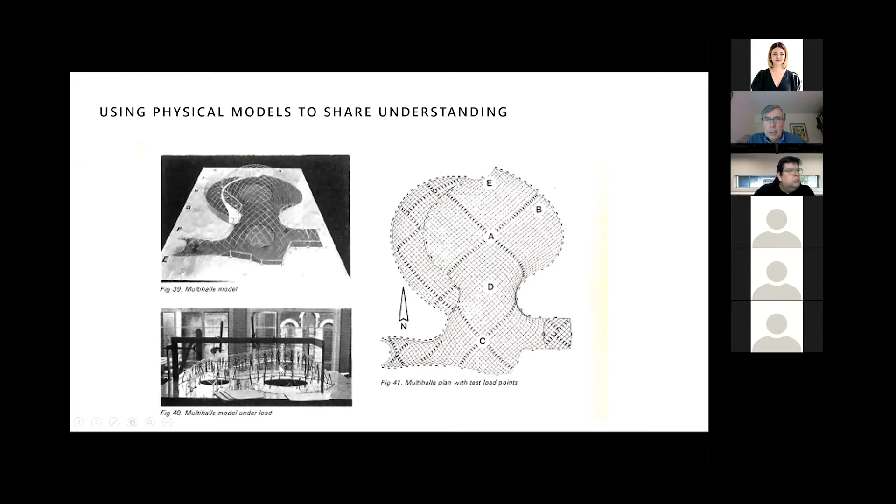And I was busy hanging nails on models of this thing just to find out when it was going to buckle. And that was really exciting and fun because I could feel the forces. I also had to write computer data to go into it, and that wasn't very exciting. And I never did get my computer run to run because computers were big, ugly things in those days and not very user-friendly. So I didn't get very seduced by that.

But out of this, when I was 18, I started to find people I wanted to align with and built an agenda around natural forms and efficient forms. And that drew me away from London to Bath, where Ted had set up a practice called Buro Happold, and the university, working, in fact, up at the university on models for air support structures. You can see the wonderful low-tech research that I was doing, nothing like what you could do now.

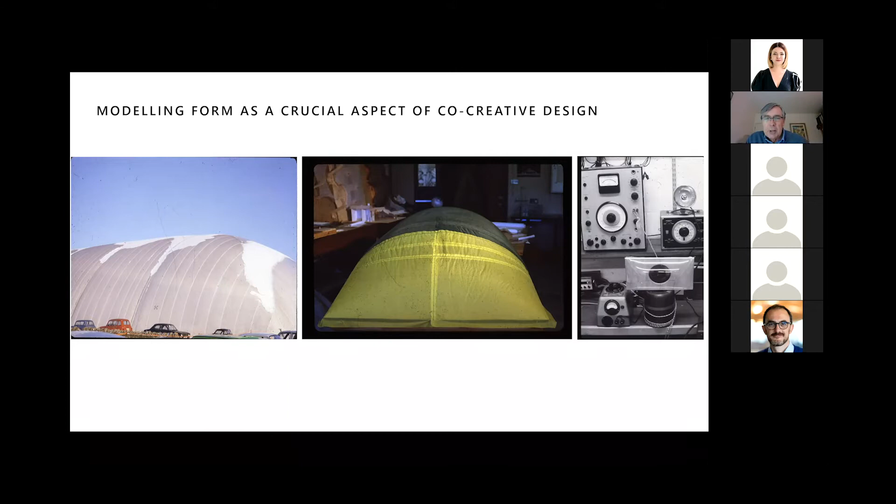But that set me off on a trajectory with Ted Happold and his various partners that had set up Buro Happold, looking at natural forms and how we might build them. So on the right-hand side, building models of these rather interesting and beautiful, naturally inspired forms. And that took me in the very early part of my career to kind of seduce me fully into this idea of beautiful buildings, co-created between architecture and engineering, buildings which really didn't know whether they were architecture or engineering because they were both at the same time.

And going right through to this 58 North project for Alberta, a large inflated roof over a whole community, where you had to bring in psychologists, sociologists to really understand the impact that putting a whole community under one big roof might have.

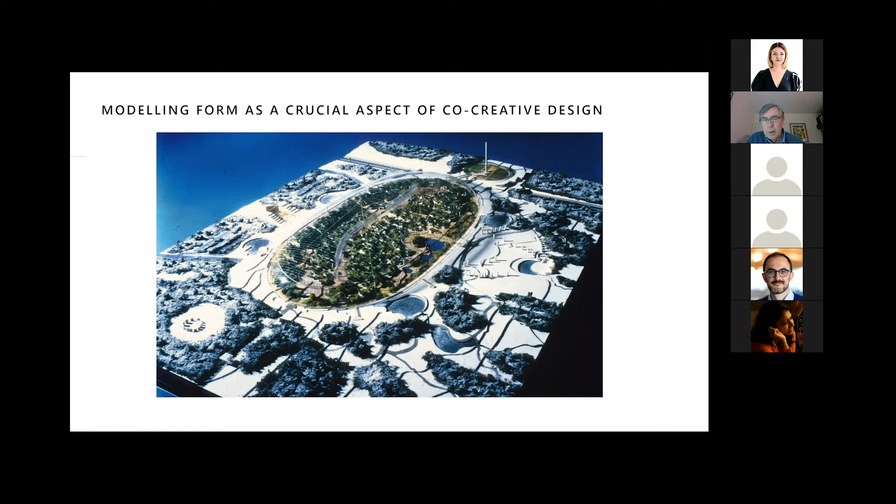So I realized out of this was coming a kind of instinct for collaboration and the using of the central model as part of that collaboration. And with good collaboration tools like physical models, being able to co-create so that you could sit around a table, model in the middle, and whether you were an architect, a building services engineer, a structural engineer, or a client, you could kind of communicate to each other. And out of that communication, you could co-create your answers.

Now that was my start, but I couldn't spend all my time doing lightweight structures. So when I did more straightforward structures like this at Bedfont Lakes IBM marketing headquarters, I found myself lucky enough to also work with collaborators who were really interested in this coming together of engineering, architecture, materials technology, and effectively natural forms. And so working with Patty Hopkins at Bedfont Lakes, I was even there able to bring in things like tree-like columns, which got bigger towards the base and celebrated the connections with the exposed beams, shading, which was just lightweight, canopy over the atrium, and so on.

It's a stretch, but working with architects there who were really interested in what the engineering wanted to say, what the physical solutions really wanted to be, and how best to use materials, allowed me to carry on what I'd learned in Bath into mainstream architecture, if you like. This is mainstream in terms of building between two existing Edwardian buildings. You know this Imagination headquarters next to the building centre in London.

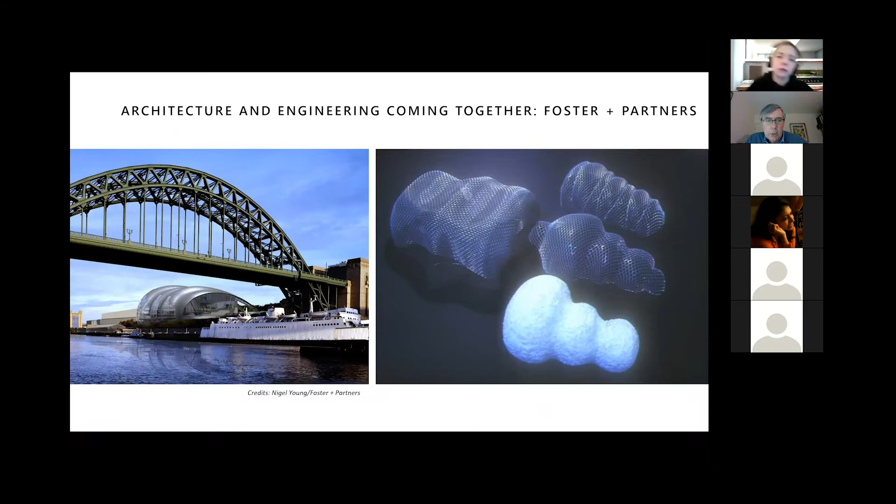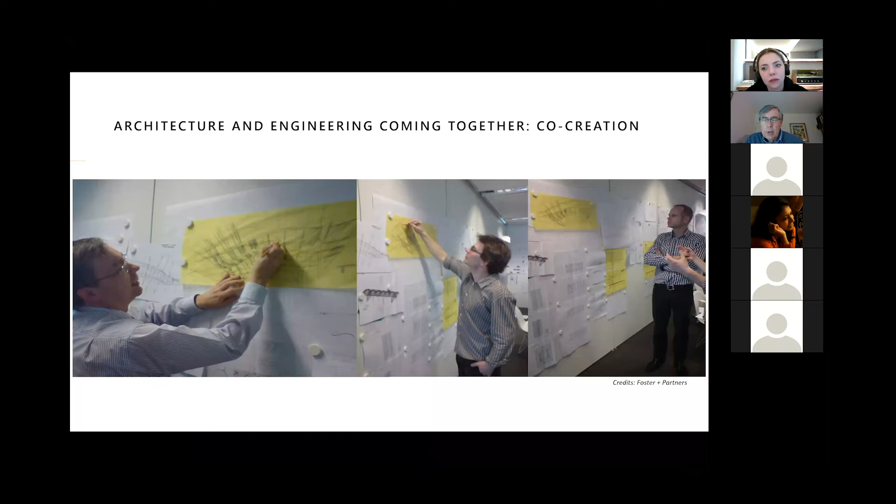And what I think I was learning, and this is where I'm trying to take us to on this journey, is this need to co-create, not just with our own collaborators like architects, quantity surveyors, and so on, but with the client. And even at this stage, working with models and working also with other methods like sketching. Now, I only really realized it when I looked back, that it was really essential for me to be able to talk to these people in a very immediate way, in a meeting, to make the decisions and to get people joining in. And it turned out that just that simple sketch, for me, became a really important tool in how we communicated, and got everyone to join in the same process, the shared sketching, the shared doodle, as we start to test ideas with each other and co-develop solutions to those.

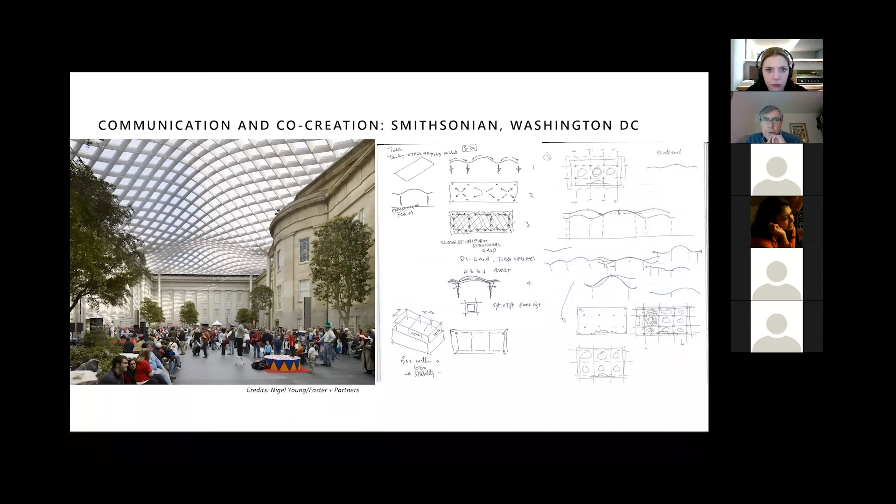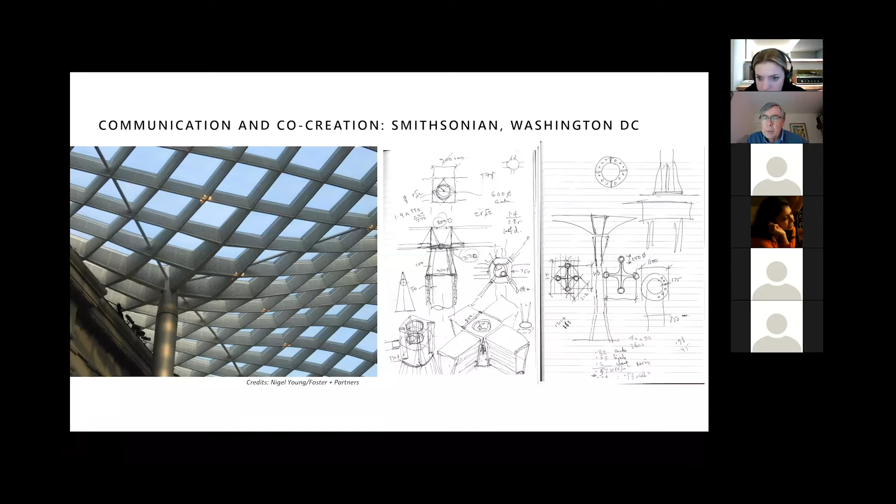So I threw in a few of those doodles. I got a few of my old notebooks that I hadn't thrown away against some of the projects, and I just want to emphasize how central this has been to developing my way of working, my collaboration and my co-creation. And here's the Smithsonian again, and these doodles, which need to happen right in the immediacy of a working meeting, so that everybody can take part, add their pieces, throw it in the bin, start again. And that's a process which I'm sure can be reproduced remotely digitally, but you have to make space for that to happen. You have to want it to happen, I think, to get to that level of co-creation.

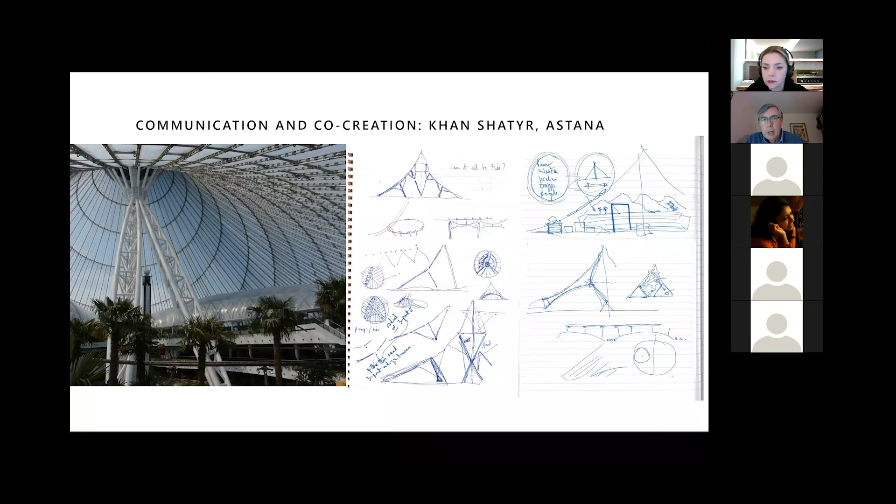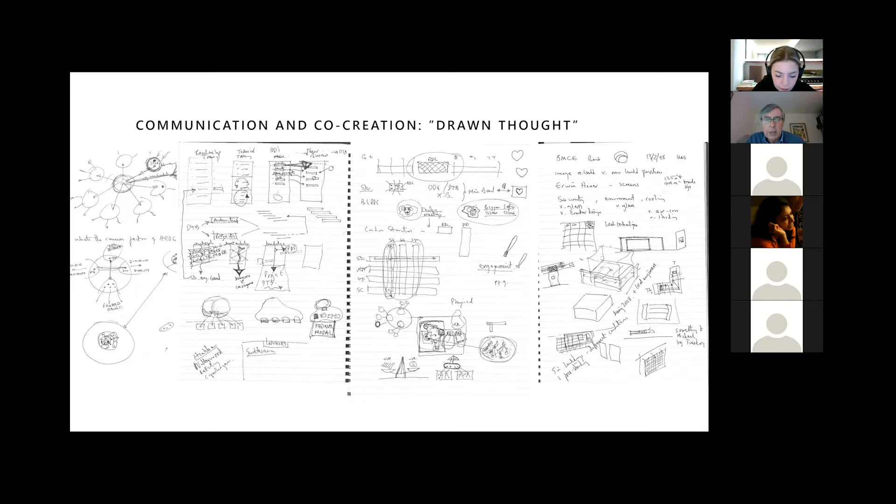And I've now found that it's not just when you're designing buildings. In almost every single meeting I go to where we're trying to collaborate and co-create a solution, I can't really help myself but draw up diagrams which summarize the thinking in the room. It's not always my thinking, it's the thinking in the room, to say, I think this is what we're saying, and then we can start remodeling. So collaboration and co-creation is also an important feature, and it belongs in that triangle.

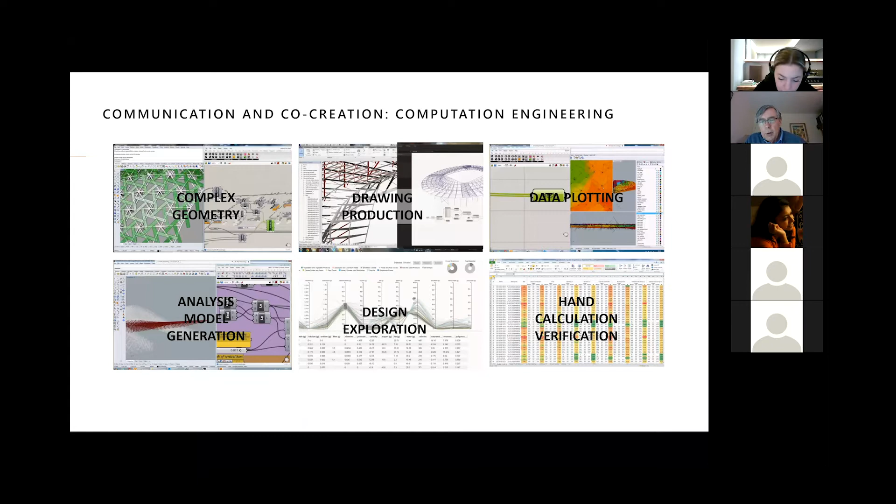And then finally, I realized the next step in my career was, as computational engineering started to really take off, I'm not a programmer, but I enjoy the ability to amass so many layers of evidence behind how things are working, to really understand more deeply a level of evidence that you can't get in physical models alone, and you can't represent in sketches alone. And this is a really important other tool as far as I'm concerned. So I started to realize computational engineering to help us understand environments, to help us control what we produce, was really important. And then it became even more exciting when I realized that we could start to look at how people work in buildings, walk around buildings, experience buildings, and how that might change their emotional state even. And so that became a really important focus.

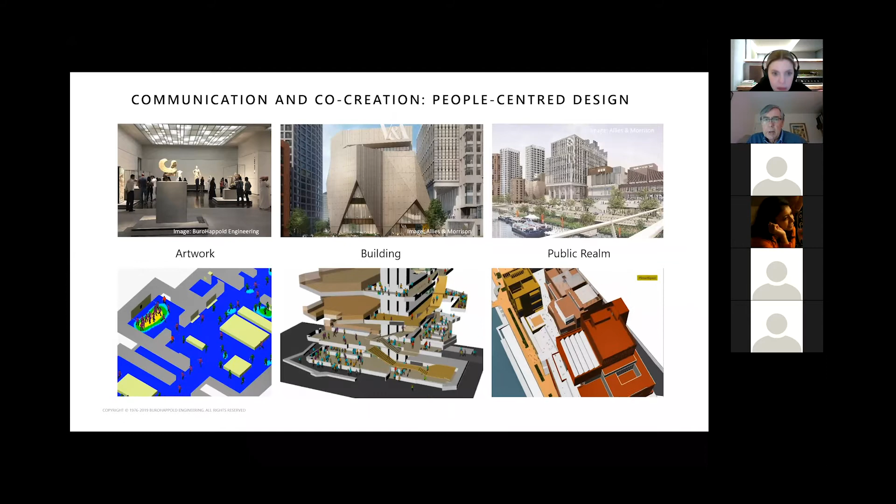And I see that as just a smooth trajectory, really, into bringing evidence into design, but then evidencing how people will experience the design became really exciting to me as well. And that's something that we've been developing in the practice over the last 10 or 15 years.

And using those as tools, I put this up working at the Barbican, for instance, really quite recently, tools which clients can sit around the table with you and for the first time understand some building in action, as complicated as the Barbican Centre, as we all know. It's pretty complicated, and to help illuminate the problems and co-create the answers seemed really, really exciting,

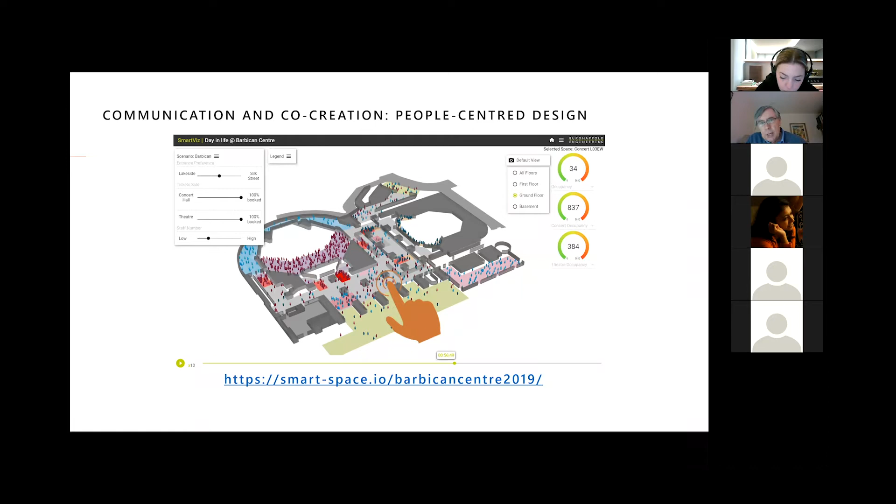and I think is important. And then to translate that into emotional human aspects of how people are responding and how you can help your designs make buildings that are better for people became central. So that's a sort of progression. And when I look back, in a way, that's all we were doing when I was almost in my short trousers working with someone like Frei Otto.

He'd been exploring a new kind of architecture, which brought much more humanity back into it. As a reaction, I understand, to the period of history in Germany that he'd been through. He wanted to react against that because of the inhumanity and bring nature and humanity back into architecture. I don't think I realized it. Perhaps that permeated into me quite strongly.

So now I can see, by using all the tools and using them for co-creative purposes with the right agenda, we can do amazing things. And these are two projects of Buro Happold's that I personally have no responsibility for at all, but they're the two that I admire the most. And I always make a point when I'm in Riyadh to visit the one on the right, or in New York to visit the one on the left, High Line, obviously.

I always make a visit there, and it always gives tingles up my spine when I go to both of these projects, because it's bringing a kind of restored nature back into the city. It's creating a place in the city that so many people flock to and just have their spirits lifted. And we need these places in our cities. And so I'm always so pleased to have these examples to visit. And somehow this needs to be the sort of theme that we introduce into our projects where we possibly can.

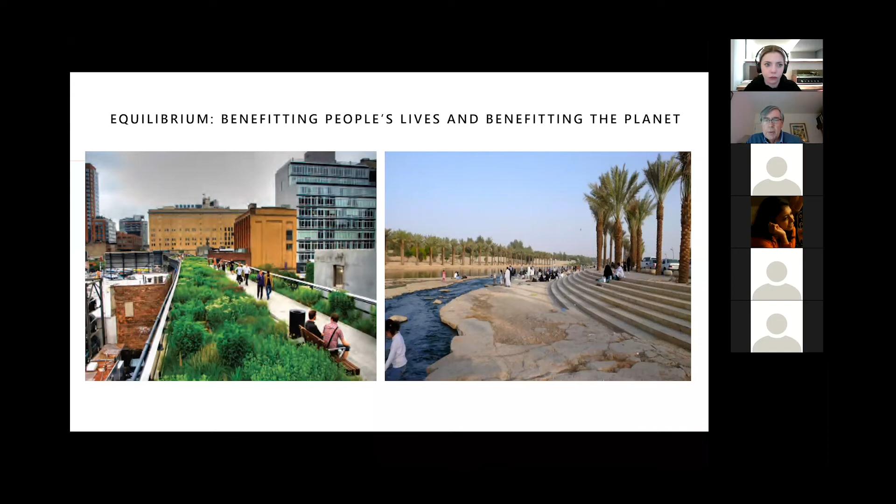And in a funny nostalgic way, it sort of takes us back to how it used to be, with this kind of equilibrium where people helped each other, co-created, used the materials that were natural and the resources they had, and had a kind of empathy with their environment. It all makes a kind of sense now. Can we bring that back in? Because I think in projects like this, there is a kind of empathy for people and an empathy for the natural world that gets brought in.

So back to that diagram, the destination, I think, is what I'd call refinding, if you like, this equilibrium. Through the right people working together, through the right processes that allow and respect co-creation, and then having that kind of empathy with each other and with the people that will be impacted by what we're developing, and with nature, having empathy with the natural world as well. And that kind of defines answers to the who, the how, and the why.

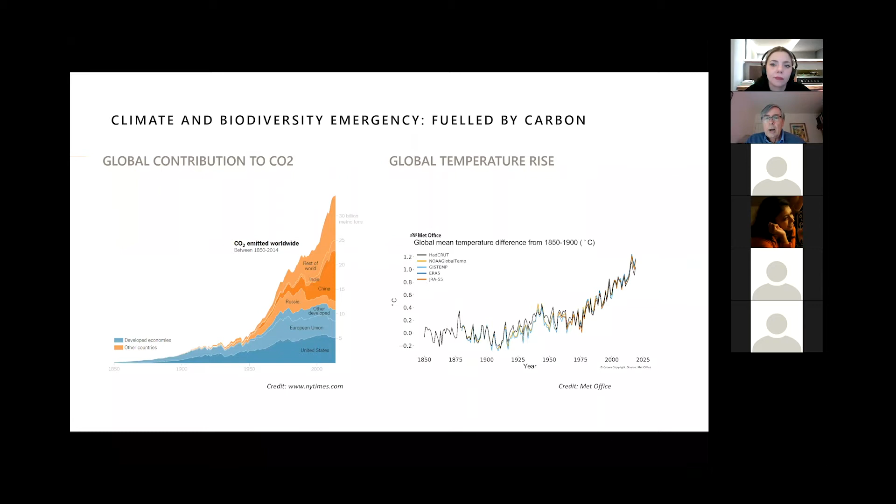So in this kind of emergency situation, people are really becoming sensitive to what are the solutions? How do we develop in a much more empathetic way with nature and the natural world? And we've seen as this has accelerated and spread across the world, these massive temperature rises, the contributors to this

problem. There's a long debate about how you measure that contribution, but generally speaking, those who've contributed to the problem have prospered, and those who've made very little contribution to the harm that's been done are failing to prosper. So there's a real inequality about where we've ended up. And we need to find ways of reversing that harm, and that's not simple.

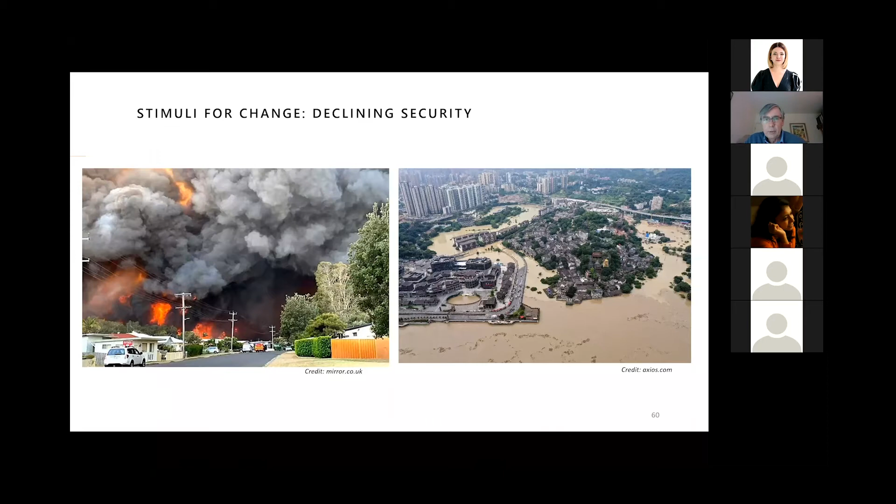Sir, you're muted. We've lost your sound, Mike. Yeah, I just saw that a thing came up on my screen. You should hear me now. I don't know why it did it, just automatic. Yeah, we hear you. Okay. People speaking out. It's strange, people speaking out and I get muted.

And we're seeing more and more of that, and I think we will see more and more of that. So there is real stimulus for change and real reasons for change, and I think these need to be more and more visible to us, so that we can

Right. It's interesting. Here we go. Just had a little IT breakdown for a moment there.

So what are the kind of drivers? There's definitely things around us that we can use as available drivers. And one of these is the technology that's available to us, which improves the way we do things, improves the way we communicate, improves the way we think, potentially in AI. I'm not a great believer in technologies as a total solution, but as a piece of the solution. Better use of our materials, better ways of communicating, better ways of thinking even are potentially part of it.

Part of it also, and I've still put this under technical, is a different way of thinking about development, where we prioritize the positive impacts on people and on nature, and move away from the negative impacts. And I always find the Living Building Challenge a really good checklist for being able to create a regenerative development, which causes healing and takes in more CO2 than it puts out, and more than that, heals the environment.

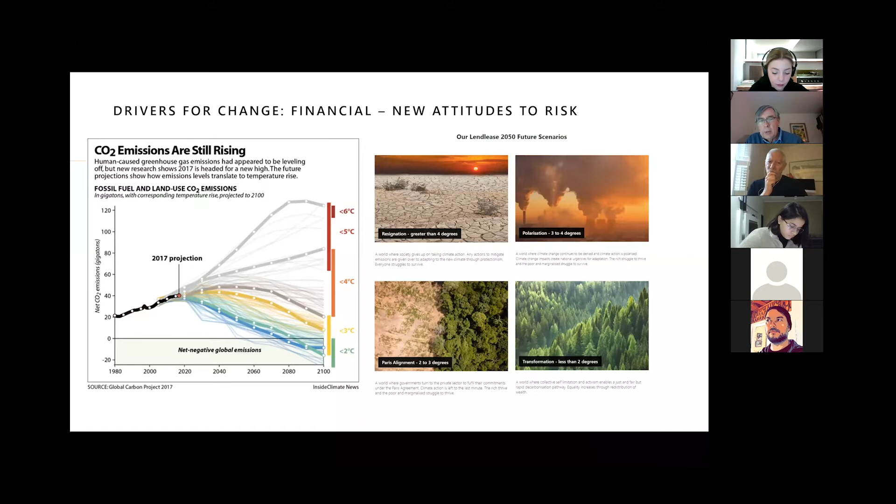So new business models are coming in, and new priorities coming in, and cities starting to declare and think differently about the priorities for their own development. So those are all the reasons for being positive, if you like.

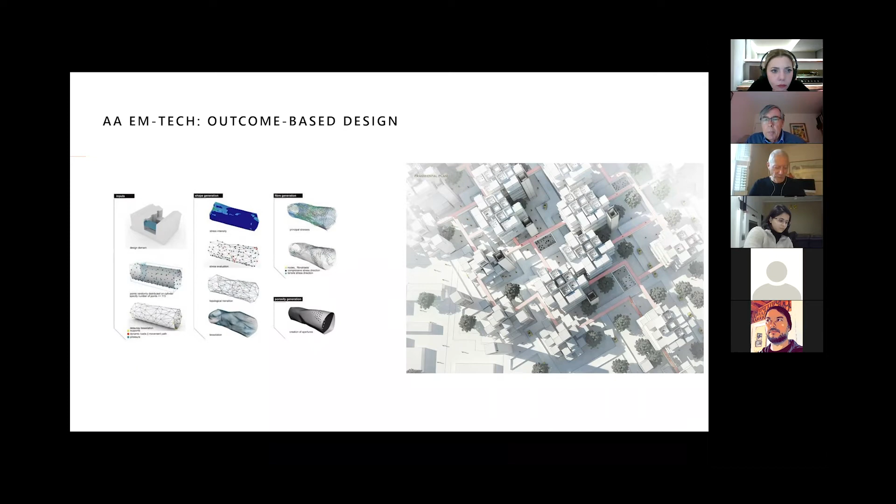But what I see at EmTech, for instance, and what excites me is architects and some engineers who I think will become co-creators of the future, they're bringing in really outcomes based on evidence, based on building an empathy with a problem, if you like, and the people that are suffering that problem.

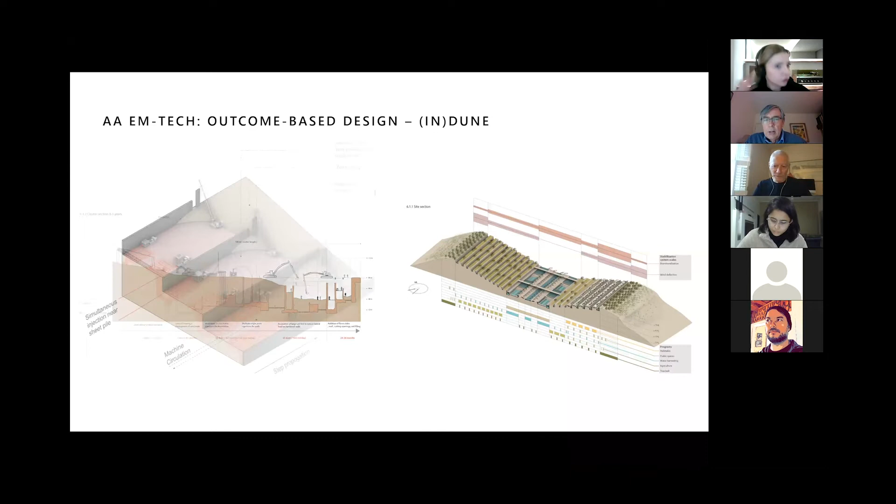And we come to some of the projects, recent projects here, where you have problems of desertification, and find technical solutions. Well, first find the evidence to understand the depth of the problem, and then find technologies and solutions that can build out of that problem, and then create an architecture that relates to that problem and relates to the people that are going to live in those circumstances.

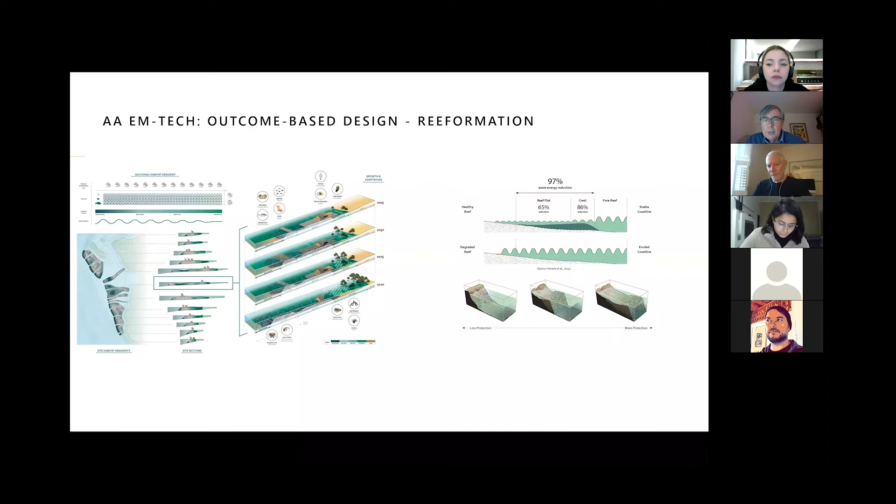And another one, not so much deserts, but oceans, thinking about a major problem, often stimulated by climate change, but that doesn't really matter, that affects many, many people. And it's building off real evidence, finding out how to use technology to gather more and more evidence about what the problems are, and start to test out solutions. And out of those solutions, build ideas, and out of those ideas, build a kind of architecture for the future.

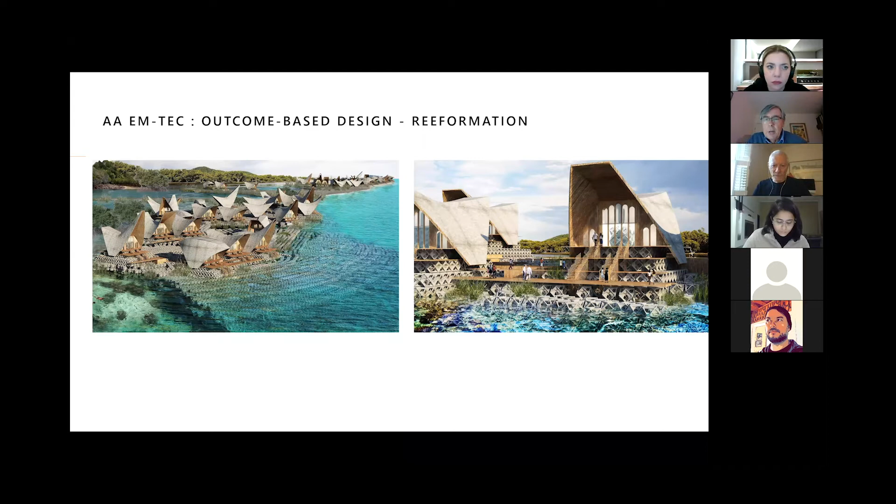And I think that way of thinking, which is pretty parallel with what I'm trying to do with my engineers, but I don't end up with such delightful imagery, is really an important thing for the future, creating this kind of thinking. And I still see empathy as a really important thing. I think we build empathy by looking at the evidence, looking at what is happening, understanding how it's happening for people. We use these tools, and those tools allow us to share thinking and processes with everybody, and that means we can co-create.